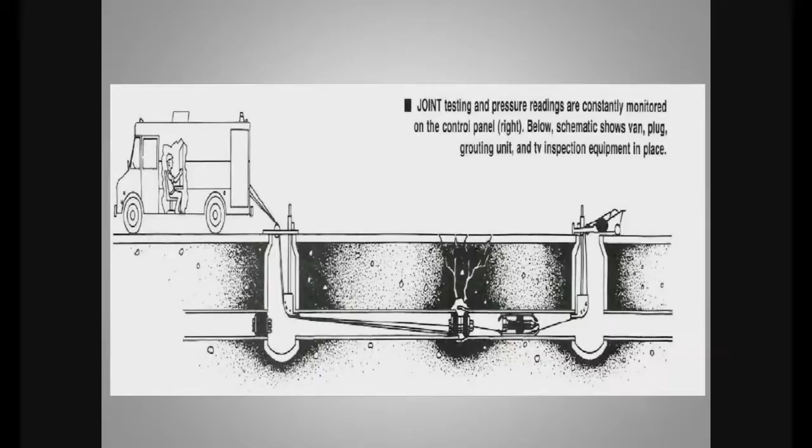So like with any other technologies, good jobs built confidence in chemical grouting, while bad jobs had just the opposite effect. So NASSCO was established to develop standards and ensure the growth of trenchless technologies. And chemical grouting was a big part of NASSCO's history right from the beginning. It was important to companies who did chemical grouting that all the companies would be held to the same standards. So the Performance Standards Committee was one of NASSCO's first committees formed to address the lack of uniform standards back in 1976 and before, and particularly with chemical grouting.

By 1978, a grout task force was started by Bill Thompson, James Witt, and Ray Barr, and some of the topics that they discussed back then were similar to those today. First of all, they influenced the EPA to fund research on grout alternatives, which would include performance specifications for all grouting activities. They promoted funding for private property or private laterals to address problems with private property I&I. Remember, this was back in 1978. And they educated system owners on the benefits of grouting with fact sheets and what we called sewer savers.

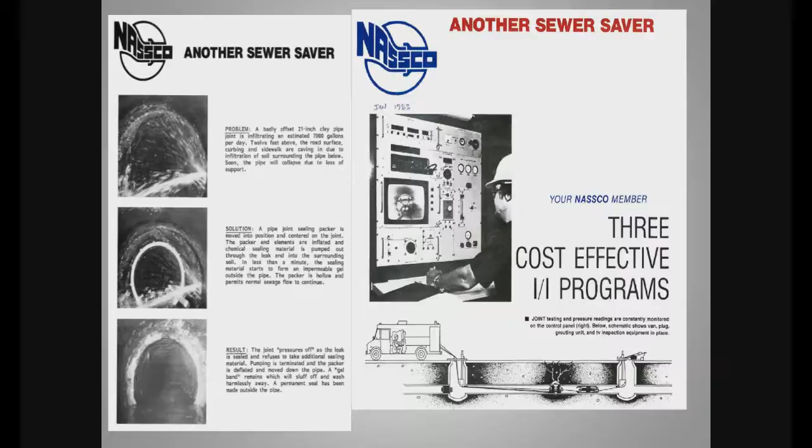So in 1980, NASSCO developed what was called the Inspector's Handbook. The Grouting Task Force also developed the Grouting Longevity Brochure, the Grouting Fact and Fiction Sheets, grout mixing and utilization forms, and a lot of educational resources like you see here. And by 1989, NASSCO had invested a significant amount of time and resources into grouting. But as it turned out, this was only the beginning.

In 1990, the EPA released an acrylamide report, and NASSCO met with EPA twice that year. The acrylamide ban that was proposed went on for 12 years until 2002, when the task force was successful in proving that the ban was really not necessary. So the ban was lifted for all the right reasons, and it was really due to the resolve of industry icons like Trent Ralston, Dave McGill, Norm Cerna, Bill Thompson, and actually our next speaker, Harold Kosova. You know, Mark Anktel is going to introduce these and many others who've contributed to the grouting industry and provide some more details on the ICGA.

I'll tell you, though, I just want to say that these NASSCO members epitomize NASSCO's resolve in taking a stand for the industry through cooperative efforts of competitive companies. They came together for a common goal, and they really achieved those goals. So since NASSCO was formed, the grouting industry has exemplified NASSCO's charter to serve the entire industry by increasing the success of grouting contractors to grow the entire grouting industry. You know, we're proud to have the grouting industry, now represented by ICGA, as a part of NASSCO.

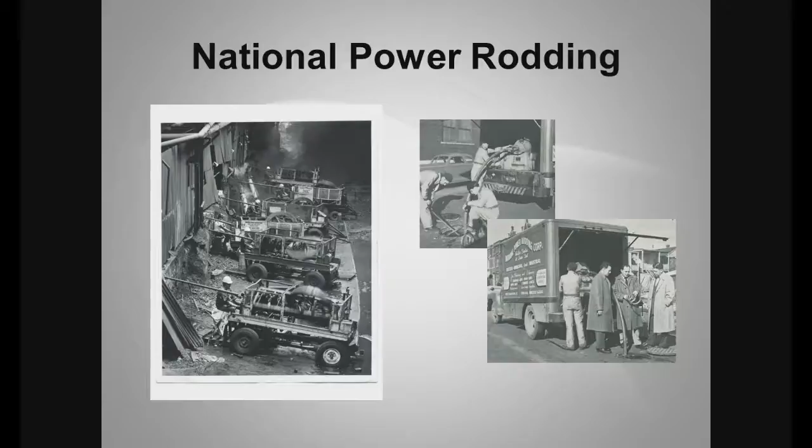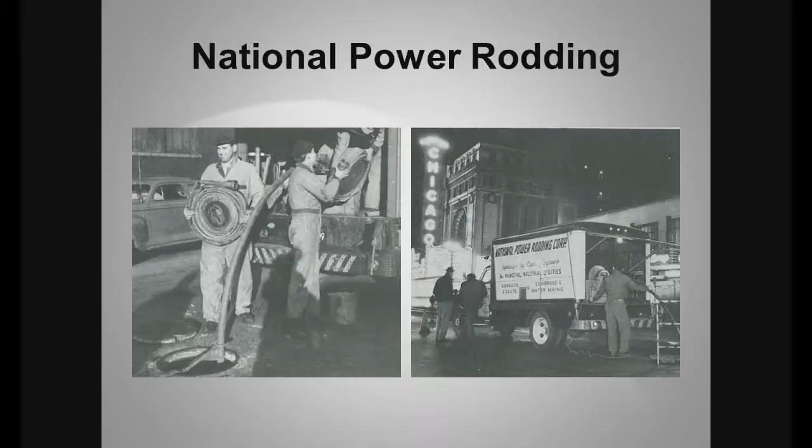and sewers. In 1960, National Power Rodding Corporation hired me as a graduate of the Tech to develop a television camera that could televise sewer lines. Over the next few years, NPR began developing methods to help remotely repair faults revealed by the closed-circuit TV cameras. The path to success was difficult and necessitated many failed attempts as well as complications and problems.

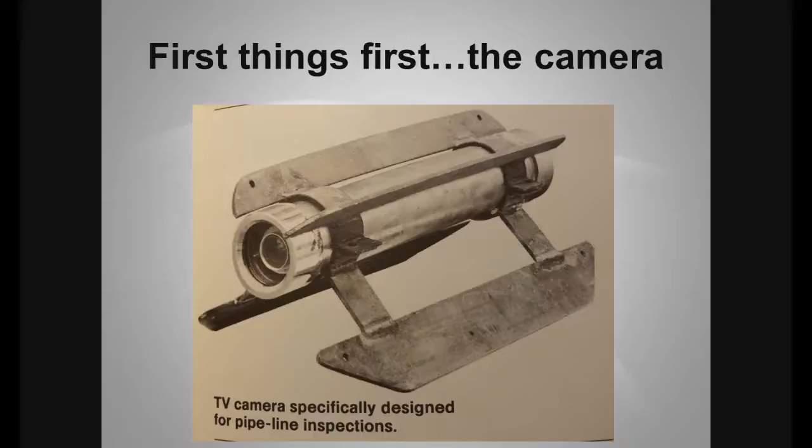To solve the problem of pulling the camera through the line, NPR had to first develop a skid which could carry the television camera. NPR also had to devise proper lighting as well as proper cable for the camera, requiring 28 separate wires that had to be connected to a watertight connector. The connector then plugged into the television camera.

The ability to use robotic technology to remotely repair sewer line problems was a major breakthrough, since it enabled the users to discover and repair a problem without the need to physically break through the street surface. This offered a significant cost savings to the company and to municipalities and industry. In 1962, NPR developed chemical grouting of sewer lines. The use of the television camera enabled NPR to perform pressure chemical grouting and sealing of infiltration in sewer lines.

It all started with the need to eliminate infiltration within an 8-inch sewer line, 25 feet deep, in Cottonwood Falls, Kansas. NPR had our newly developed video TV studio, and the contractor had chemicals newly developed by American Cyanamid. These chemicals subsequently became known as chemical grout. AM9 was the first and only product. The contractor and I developed a packer that would inflate on either side of the sewer line joint.

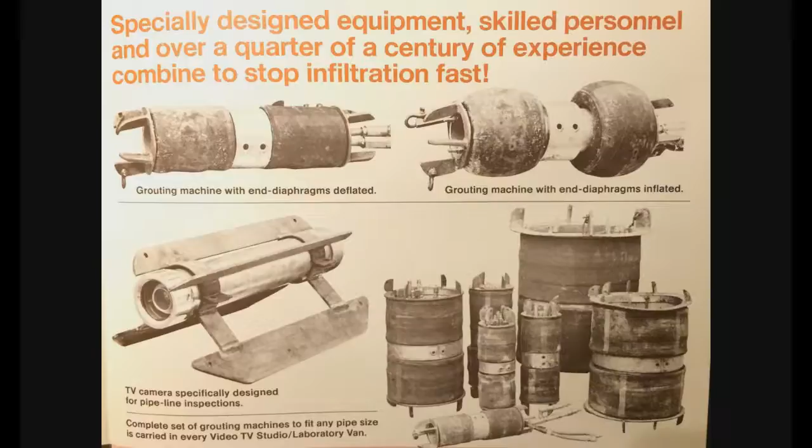We then mixed the chemicals and, using the grouting packer, pumped the mix into the sewer line joint and into the surrounding ground. This was truly an experiment, since no one in the industry at that time, including ourselves, could predict the procedure's success or failure. We pumped the chemical grout into all leaking joints, but were unable to get them to seal.

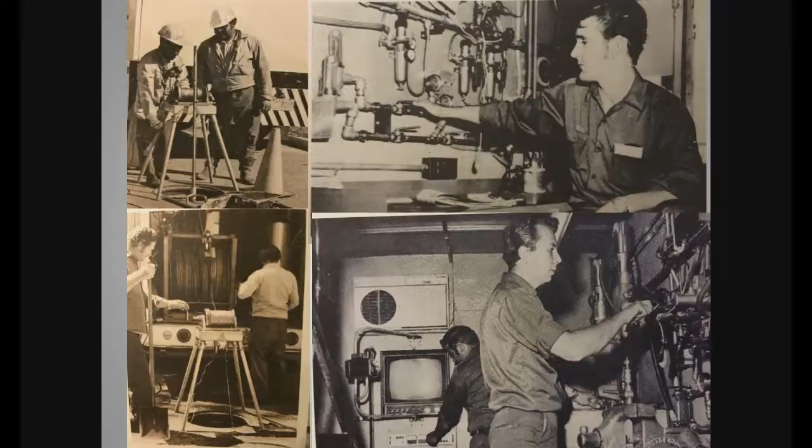Later, when getting to a downstream manhole, we removed the packer and proceeded to televise the sewer line again. To our amazement, all previously grouted joints were now sealed. We came to the conclusion that we had underestimated the time required for the grout to set. Accordingly, we adjusted the chemical formula and we were able to seal an additional sewer line with no problem.

There were plenty of mistakes made in developing a reliable grouting process. In one early instance, we used the same oar to mix two separate vats of chemical and found that one of the vats, the AM9 vat, gelled up due to residue from the oar from the first vat being an AP vat. We also had to find, through trial and error, the proper amount of pressure required for inflating the packer and develop an effective way to blow gelled chemical out of the hose.

Today, the cost of treatments to just watertight systems are important, and municipal grouting is more than mainline joints. It is also manholes and service connections. It is critical that everyone using chemical grout be fully educated in its safe use. Contractors and engineers must be taught the comprehensive process and the specifics of where and when chemical grout should be utilized. I see companies like Avanti and organizations like NASSCO advancing the standards and growing the industry.

I have had the pleasure to teach and mentor many people over the years. One of those was Pete Fleetwood, who now serves as president of Bionomic Services in Charlotte, North Carolina, one of the Carylon companies, and a most active grouting unit. And from one old guy to another, I am pleased and proud to introduce Pete Fleetwood as the next presenter.

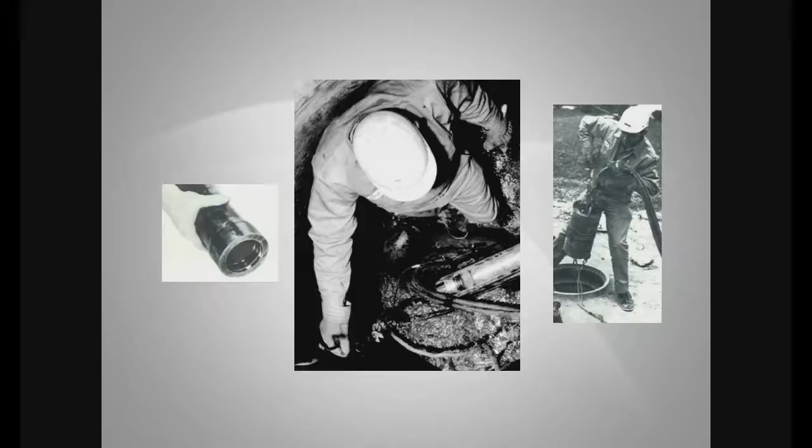What were the differences? Black and white camera weighed about 30 pounds. There was no pan and tilt. It was not self-propelled. We pulled it on a skid. Light bulbs were 500 watts, and they would burn you. Matter of fact, if you needed to light your cigarette, it was a pretty good option if you're out of matches. Images were recorded on a Polaroid camera positioned in front of the monitor.

In the 70s, we used the reel-to-reel video recorder. Then it soon progressed to a 1-inch cassette. By the 80s, VHS and beta formats were the tapes that were specified. Observation and sealing information was recorded on a paper tablet where we logged in abbreviations. You can imagine how confusing our reports were prior to PACP standards. Every operator, every contractor had their own abbreviations and naming systems.

In the early 80s, a computer-generated report became available, much like the McDonald's cash register: joint with cracks, joint with roots, burger with fries. A rod truck and a winch pulled the bucket machine. A winch called a bucket machine was used to clean the pipe. The truck could contain 1,000 feet of rod. Gas testers had not been invented. Confined space entry was seldom with a harness or a safety watch.

Once the line was cleaned and pre-TV'd, the rod pulled the camera and the packer, tagged by the cable from the bucket machine. Intercom was strung between the trucks, providing communication between the operators. Grout rig operator would relay: take it up, stop, spin, etc. The rod man would speak the footage when he stopped. The grout operator would log the footage on the tablet. A carbon copy for the customer and an original went to the office to be typed.

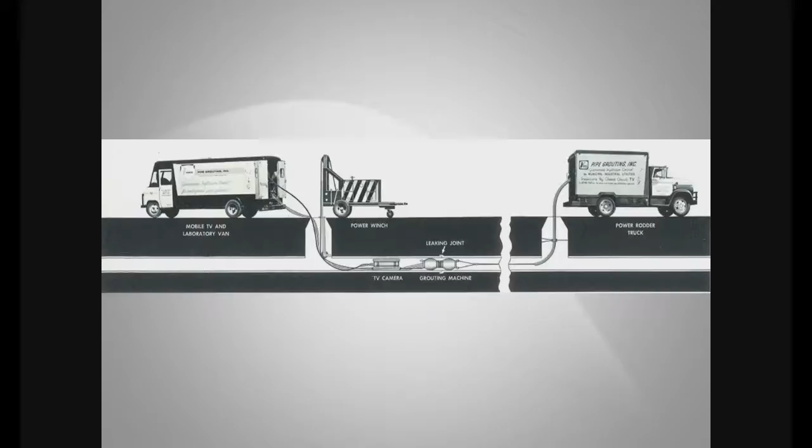Intercom signal was transmitted over a pair wire laid on the ground surface. If a street sweeper passed over the wire, communication disappeared. You weren't happy, nor was the street sweeper operator. When CBs came out, intercom was replaced. Initially, we didn't air test joints. Grouting was either consecutive or random. We manufactured our own packers.

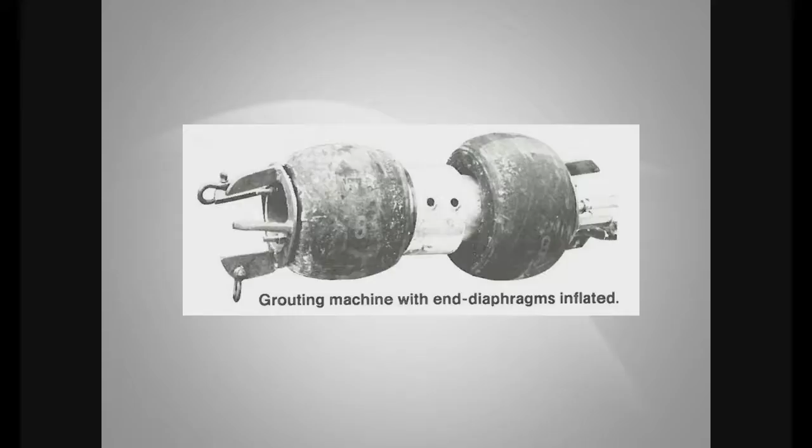Look at the size of the void. Bladders didn't last nearly as long as today's. A straight pin could cause a leak. Also, the video cable and the hose were very heavy. In a dry pipe, you were a heck of a man to pull the packer into the downstream manhole to disassemble. It wasn't long until air test was specified. We had no packers for 24-inch, so in a 24-inch and larger, you crawled the pipe and drilled.

Most important, until the last couple of years, I thought I knew all there was to know about grouting. Heck, I've been doing it since I was 20, before many others in the business were born. I was wrong. Temperature change, percent solids, gel times are relevant to quality. Jim Shelton, who's going to follow, gave me information that I had not considered.

The industry is improving. Harold's group gave us the technology. My group utilized it. Now the next group needs to use today's technology to continue the progression. Our goal is a sustainable environment for the next generations. The American story.

I'm honored to introduce Marc Anctil. He has been with Logiball for 22 years. He worked his way up to become the president. I enjoy him professionally and personally. Not only does he produce quality equipment, he can come up with some of the off-the-wall applications that I dream up. Mark? Thank you, Pete.

There's been a lot of industry game changers over the years, and I'm going to try and explain some of these to you, so please bear with me for the next few slides. One of the reasons we're still here, or when this got started, is because of the Clean Water Act of 1972. We decided to take care of basically every water that was out there, not polluting.

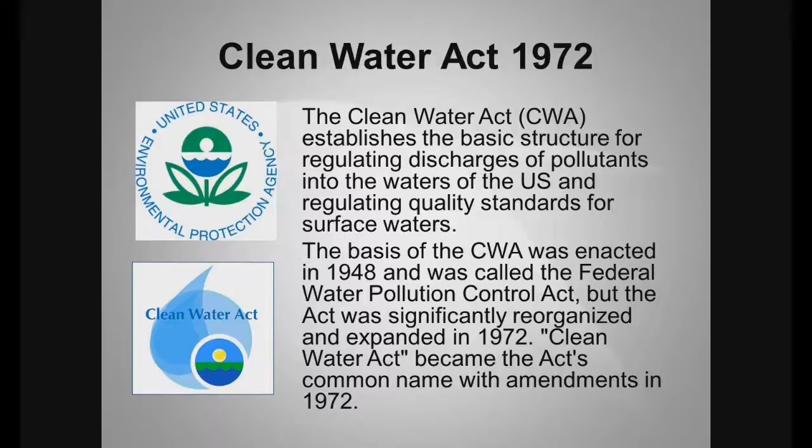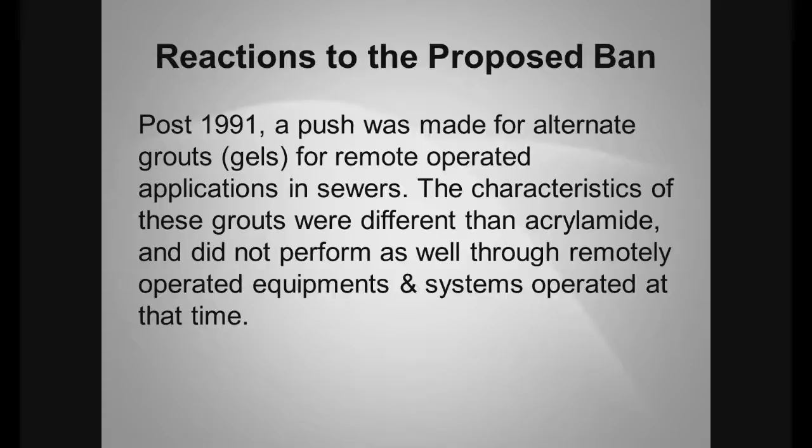In 1991, as mentioned earlier, the EPA had a proposed ban on acrylamide grout, and one of those reasons was basically the PPE for the operators. As you can see from these pictures, times have changed. One of the reactions to the proposed ban was a push for alternate grouts, but the equipment of those times and delivery systems through remotely operated equipment were basically not the best match for these new alternate grouts. Well, NASSCO and the Grout Task Force spent many years discussing and I'd say fighting the proposed ban on these grouts.

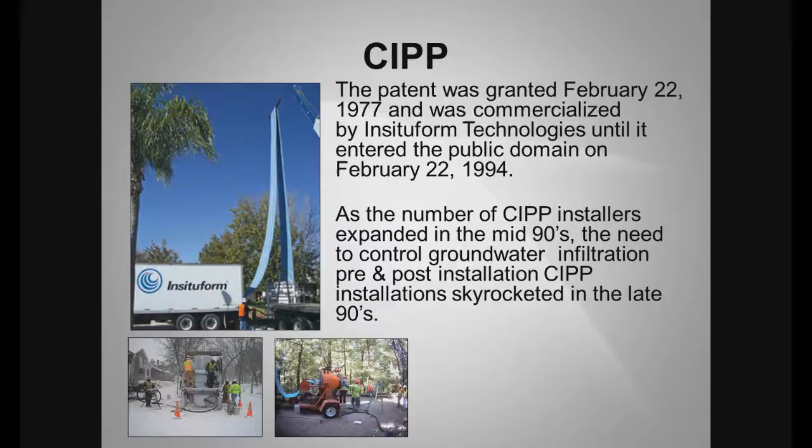In 1977, CIPP was invented and Insituform had the patent. When the patent ran out in 1994, this technology became available to all, and there was a greater need at that time to stop pre- and post-infiltration of the installations. Now that a lot of work had been performed on main lines, the groundwater infiltration was not disappearing. You would see water come in at the pipe-to-manhole connections and also at the reinstated service laterals in the relined pipes. So in the mid-90s, lateral packers became available and were used to stop this infiltration at the connections.

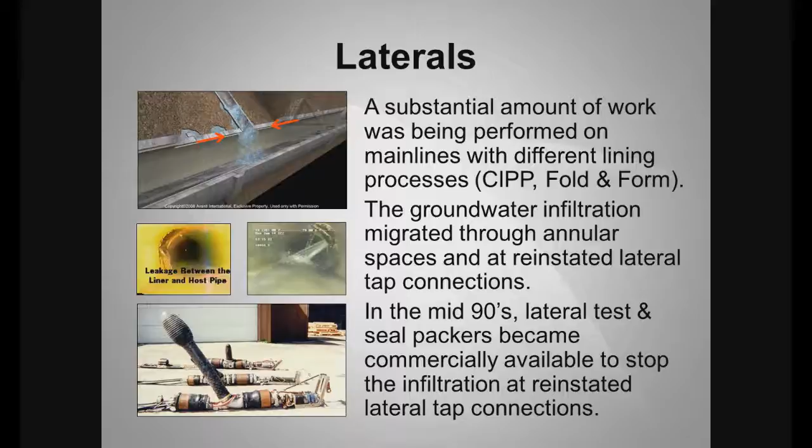In 1998 and 1999, too, the associations presented their Most Innovative Product Award to people in our industry, recognizing that chemical grouting, or injection grouting, definitely had a place in the market. Back in December 2002, the EPA had removed its proposed ban, and now that appropriate PPE would be used by the operators, acrylamide grout was back.

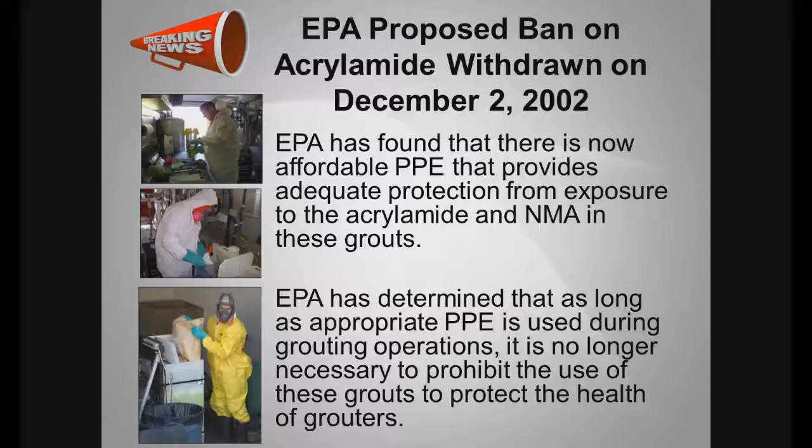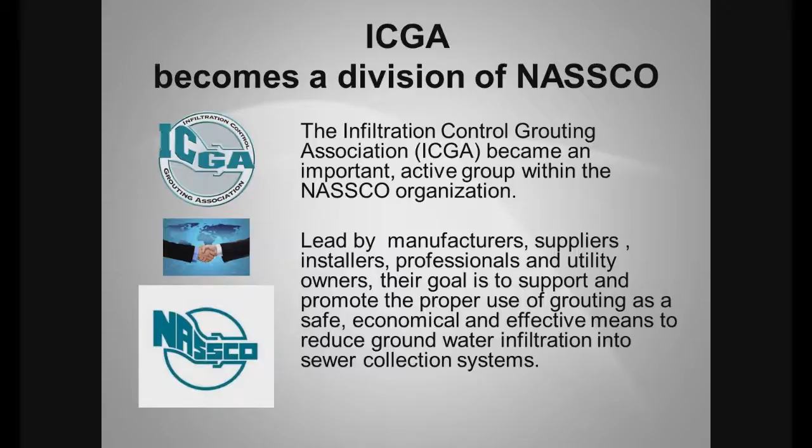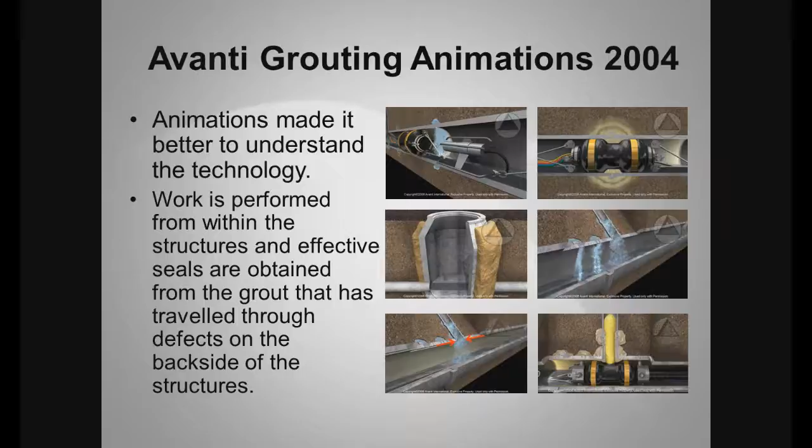In 2006, NASSCO and ICGA members, led by Dick Shans from Mary's, got together and formed a multi-vendor class, the first grout boot camps, where people come in, whether it be 20 years in the business, new ones, inspectors, engineers, for 2 days, sit down, work, and try and understand what the grouting process is all about. This is 10 years old, and we've now trained over 450 people at these classes.

Today's capabilities. Well, if we go back 40 years ago, what we can be doing today is totally different. We're sealing laterals from only the mainline access up to 30 feet. We're sealing pipes up to 12 feet in diameter. We're sealing pipes that have elliptical shapes. And we're coming up with solutions to problems that we encounter on a daily basis.

For the next presenters, it's my pleasure to introduce to you Ron Manistar from Mary's Industries and Mark Schneider from Q's. These two gentlemen have a wealth of knowledge in the delivery and camera systems. Ron? I'm going to take it, Mark. Thank you. First, people, don't be fooled by my picture. I'm very happy to be here speaking today.

Ron and I are going to be talking about the equipment used in the grouting process, and I'm going to start with chemical hoses. The chemical hoses originally started with 3 hoses, like was said earlier, which basically allowed 1 hose for each chemical and 1 hose for air to inflate the packer. Later, the hoses moved on to 4 hoses, which gave the ability to add an air medium or a water medium to test the joint to confirm whether it would need grout or not.

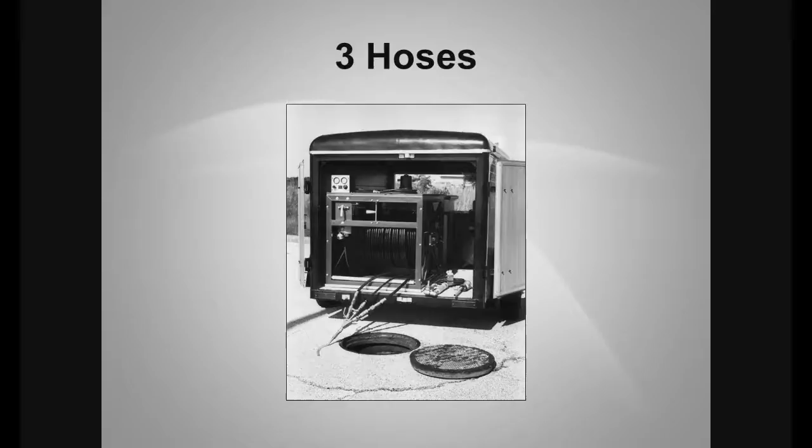Eventually, we moved into 5 hose systems, which helped better facilitate Mark's lateral packers, especially when they needed to lateral test. The 5th hose is typically used now to do the air test, because the 4th hose was then needed to inflate and deflate the lateral sock. Hoses range in length from 500 to 800 feet and typically include some kind of dripless fitting or check valve on the end of the hose to keep the chemical from leaking out when it's disconnected from the packer. I'm going to pass this on to Ron. He will continue with packers and other parts of the system.

Thank you very much, Mark.

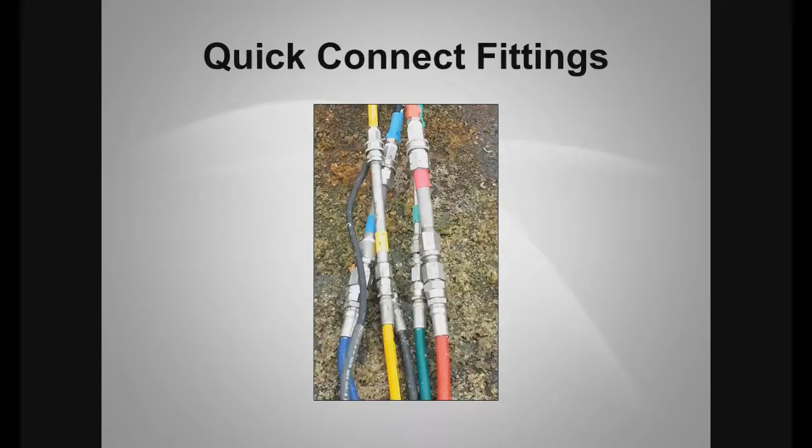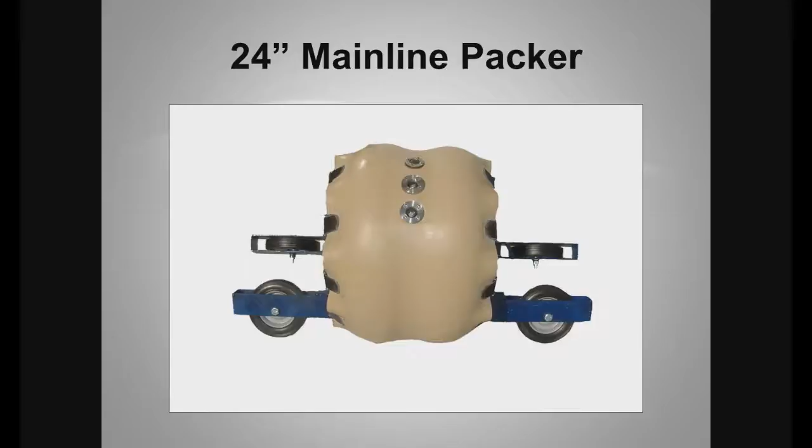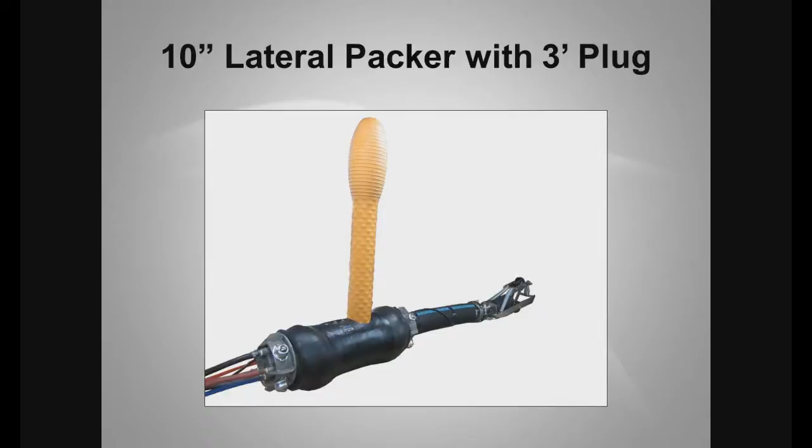A lateral packer is designed to grout the connection at the main line. The packer can rotate so that the connection between 8 to 4 o'clock can be grouted. Lateral sealing distances can be varied from 36 inches all the way to 50 feet. Here we have a lateral packer that is being used to grout the connection all the way to the property line.

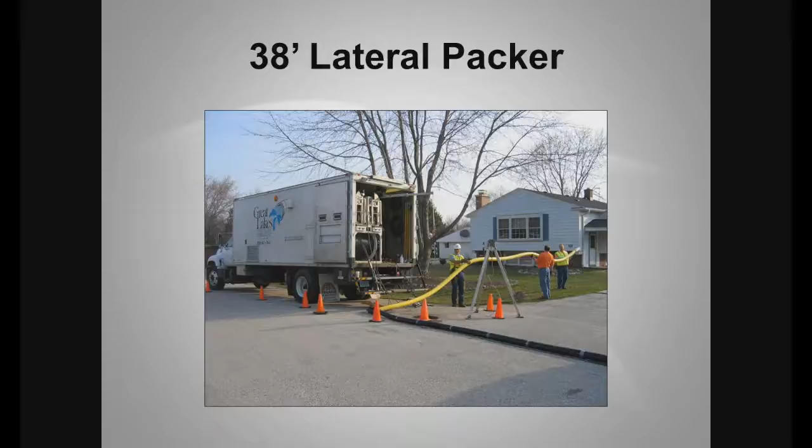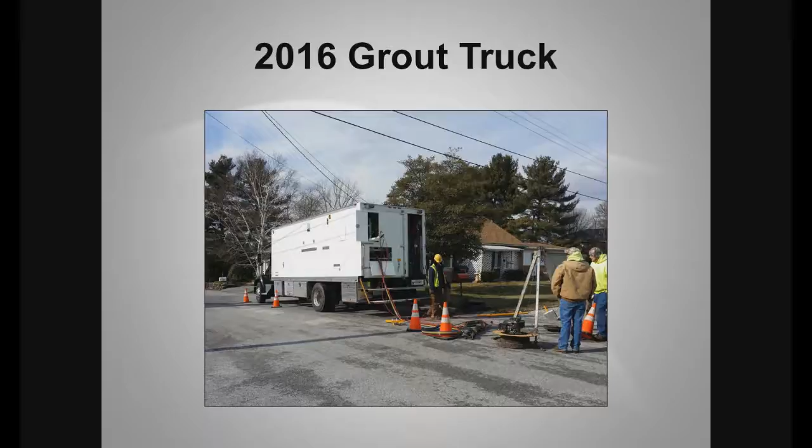Grout trucks for many years were built into step vans, affectionately called the bread truck. Very popular for many years and an industry standard. With newer vehicles now growing much larger because of safety and productivity requirements, a lot more equipment is now being installed into these trucks. Chemical tanks have increased in size from 30 gallons to 60 gallons. This increase in size reduces the amount of time that the grout technician needs to mix chemicals and enables him also to improve his productivity.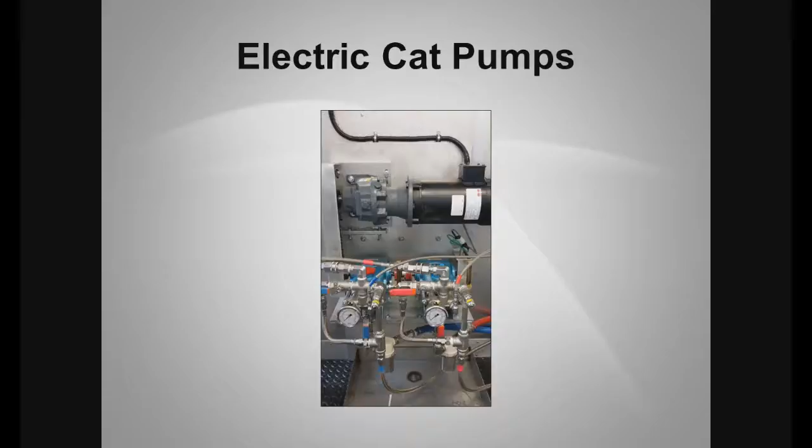Electric pumps, with their variable speed capabilities, can be controlled so that the flow matches the pathway opening through the pipe into the surrounding bedding material. The air system needs to be large enough and sized properly so that there is no loss of performance while inflating the packer and the lateral plug. A vacuum system is necessary to pull the air from 800 feet of hose and a lateral plug, enabling the lateral plug now to fully invert back into the packer before continuing down the pipe.

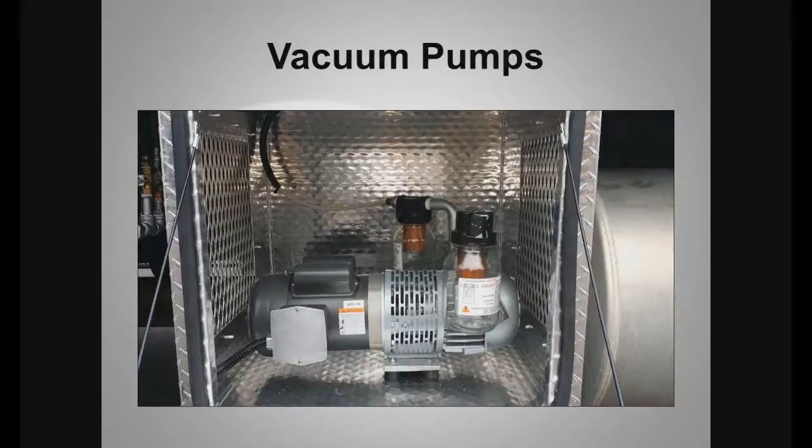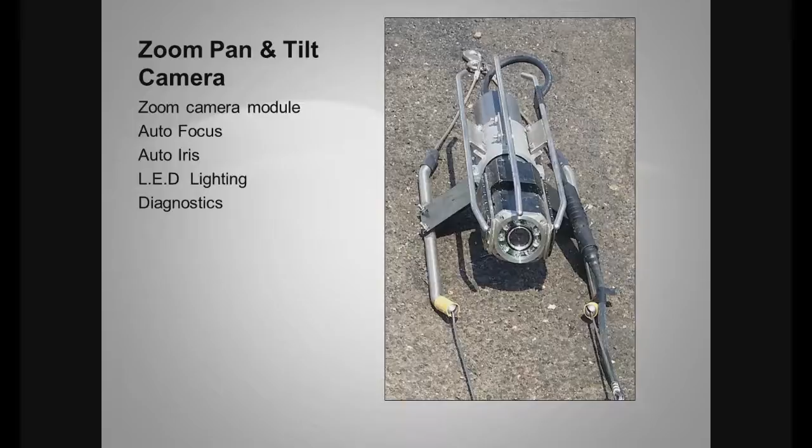The first pan and tilt cameras allowed the grout technician to view the joint and into the lateral connection. Over the years, there have been improvements with zoom capabilities, LED lighting, and camera diagnostics. And improvements are still being made with smaller cameras and wiper blades to remove the debris from the lens.

Mark, I'll turn it back over to you.

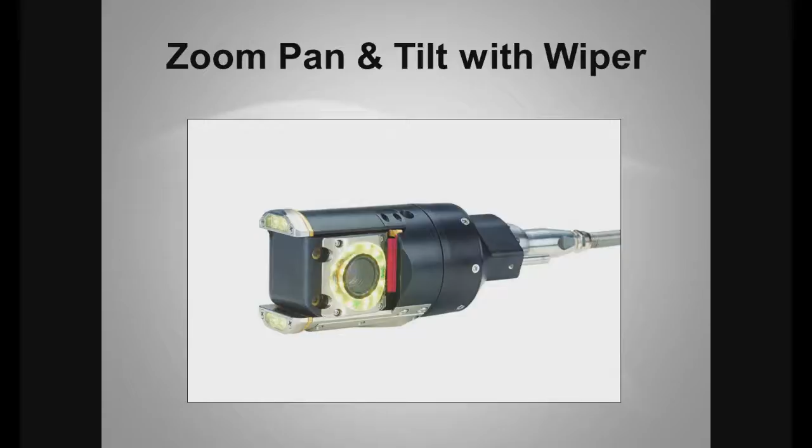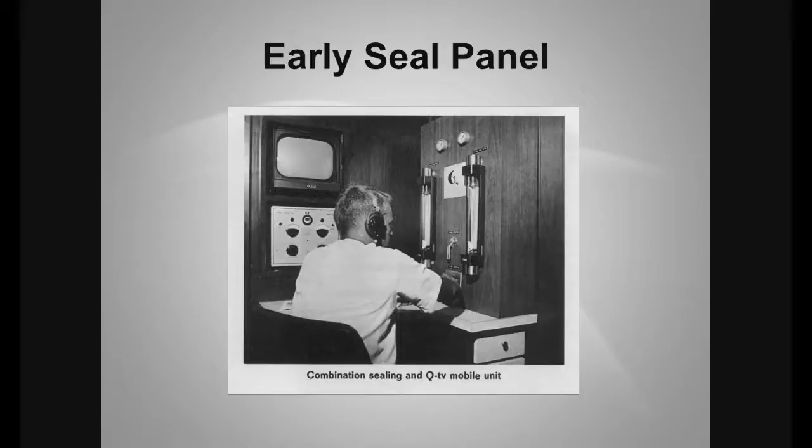Thanks, Ron. Now, there was something needed to control all of this equipment, some kind of panel. The first panels you saw earlier were air-over systems, and all that was really needed was sight tubes and control valves to push the chemical in, and a valve to basically inflate the packer. When pumps were introduced, the panels moved on to manual panels. These combine the packer inflate and test control regulators with the other controls, which would be to check the amount of chemical used, air test pressures; all that information was brought in. Also, panels were introduced to control the lateral packers that were typically added onto these type panels.

The latest technology allows for remote panels, which control a panel that has regulators and valves inside it, and is all controlled by computer. This allows for the industry specifications to be entered into the software to make sure the operator conforms to these specifications, such as minimum test pressures, packer pressures, and duration of the air test. This technology also creates a live graph of void pressure to help the operator adjust the grout pump rate as required and also watch the gel time. The computer control also allows for much more data to be recorded than the original handwritten reports or manual entries into today's pipeline software. Don?

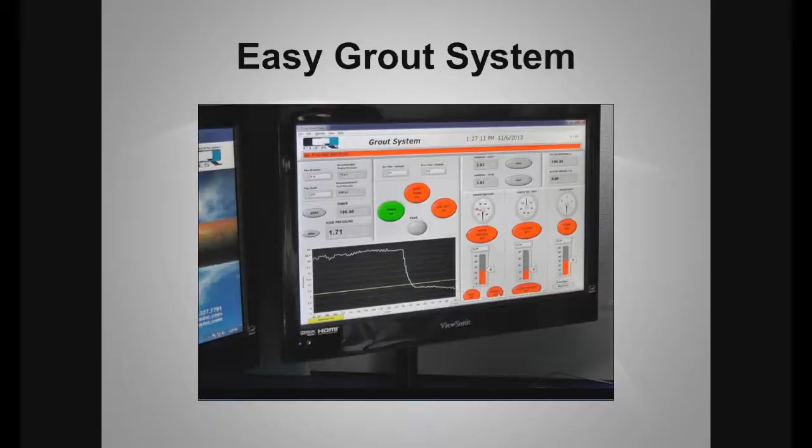Yeah, very good. Thank you, Mark. It's time for another poll question, and we have 3 of them in total. Let me send this survey out. Looking back, which technology used in grouting has advanced the most? I'm looking for a single best answer here. I'm going to give it a couple of seconds, and I'll play back the results for everybody. I think that's always interesting. Trusting you see the question, and the answers are coming in, slowly. Let me go ahead and end this question and play back the results. And it's looking like remote packers and conveyance equipment, very close with CCTV.

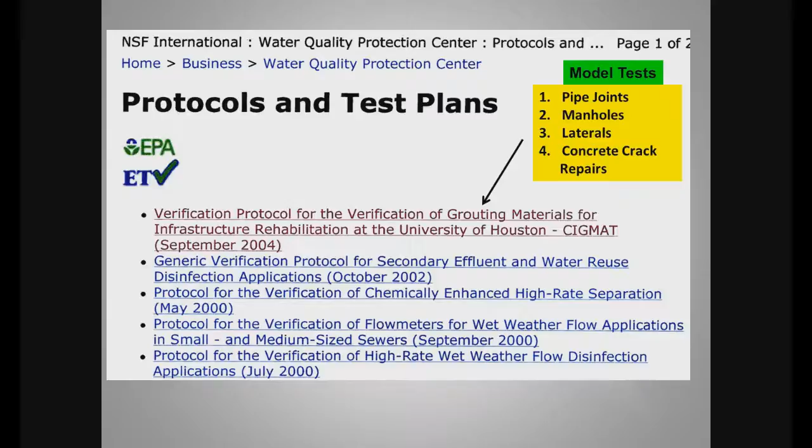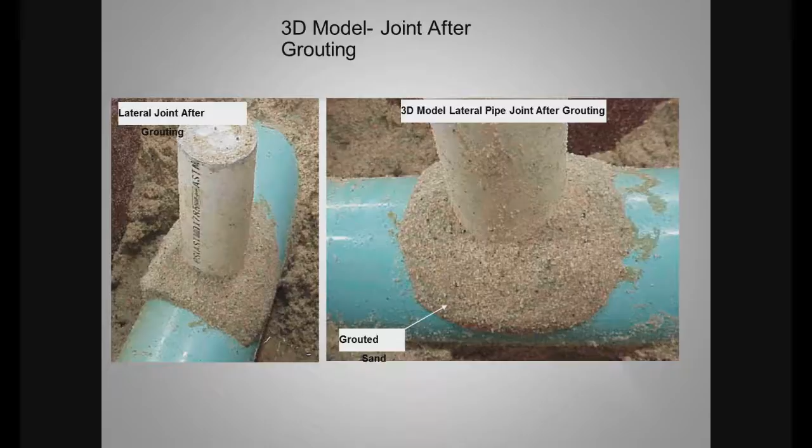If you do a repair on a lateral, how does the inflow stop? You can see from this figure how the grout gets out and actually reduces the permeability of the filling material. And you can see the shape of it. We have done modeling on all this, so we want to clearly explain the fundamentals of it, and this gets people to think about how they should be grouting to seal the joint. So this is what it is, and this is all documented.

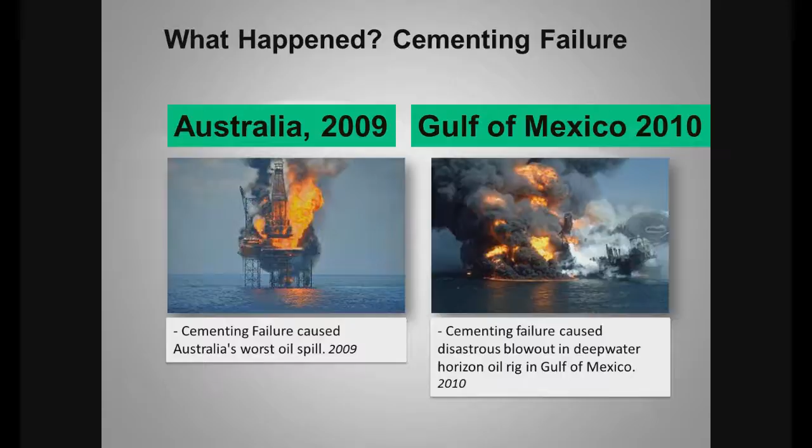So we were fortunate. After this disaster, the Department of Energy, DOE, gave us $2.5 million to develop my new concept of smart cement. And we just finished up this report. It's a 4-year study where we developed the material, demonstrated it at different scales, and we have a model well in the field that we have cemented using our smart cement, and it is working very well.

So as you all know, Romans developed this cement for application thousands of years ago. Somehow we just kept on using it. Now with our new ideas, we are moving on with new thoughts of how we can make all our grouts to be very sensing. So we have not only made the cement to be like our skin, I have also built the brain system to monitor it and tell you.

So it's a complete system that we have developed so that you can monitor the cementing during the installation and during the entire service life of the well. So we developed this concept recently, and now we want to move on with this knowledge that we gained into the grouting area. So we are really now working and developing smart cement grouts and also smart polymer grouts. And we are making them very sensing. This is research, it's ongoing.

We are making the grouts to be chemo-thermo-piezoresistive. That means they are sensitive to the chemical, sensitive to the temperature, sensitive to the stresses. And the monitoring system has to be developed. That's very important. Models have to be tested out, and also we have to quantify an analytical model. So basically what our future direction is going to be: developing these smart grouts with different compositions, but

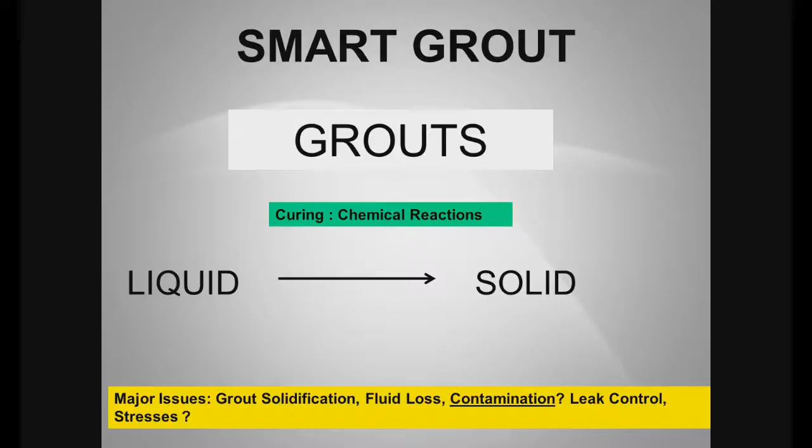So in summary, I just want to let you know that over the 30 years of development, we have worked hard, and now EPA has a verification program for testing and verifying grouts, and also grouts have been used in so many applications. You had so many speakers before me talk about it. It's been used for soil improvement, treating contaminated soils. We are using the grouts for concrete cracks and others to prevent leaks. So this is ongoing. So where do we want to go next?

Our next major focus is going to be to develop this smart grout, so that when they do these operations, they can continually monitor what's going on with the grout and monitor it during the entire service life.

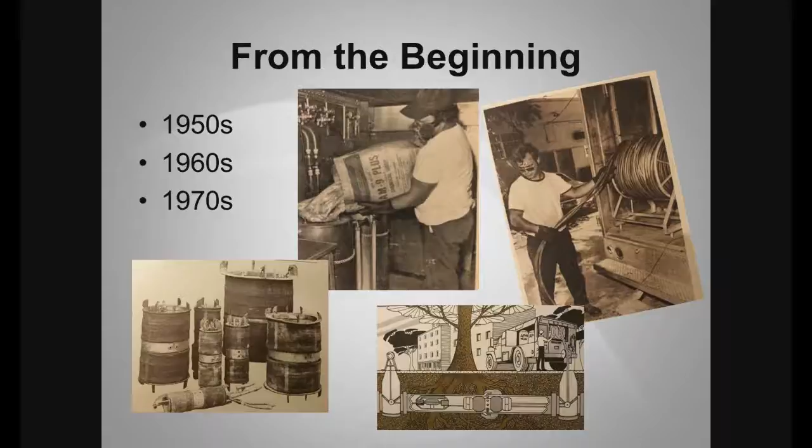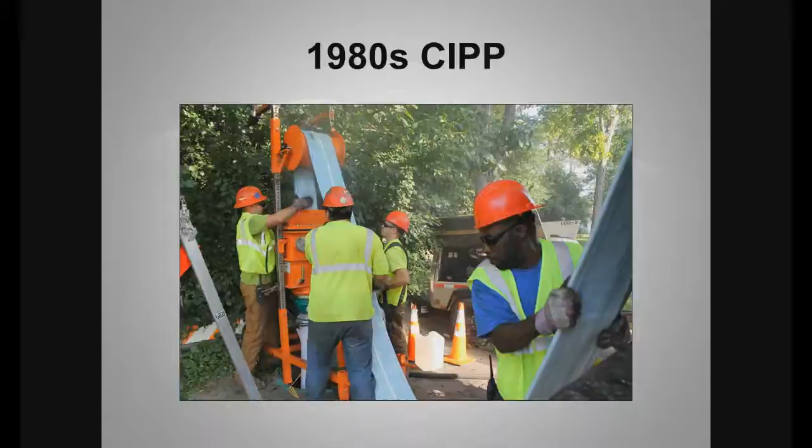Earlier we heard chemical grouting had its beginnings in the mid-50s. Its development and use excelled through the 60s and 70s, but it was in the 1980s that cured-in-place pipe, otherwise known as CIPP, was introduced to the world and quickly took the place of chemical grouting as the #1 trenchless technology. CIPP, known for its high structural strength and 50-year design life, became the sole choice for engineers for rehabbing sewers. It was believed by engineers that CIPP had a chemical bond to the host pipe.

But what they didn't know is this: CIPP, by design, is a standalone product. It is not reliant upon the host pipe. If anything could be said, it is that CIPP has a mechanical bond. So why is this fact so important? Because CIPP has an annular space, and that is caused by the cooling of the product. The host pipe still has the cracks, the fractures, and the open joints. The water, the infiltration, still enters the pipe through these openings. It travels along the annular space, and it enters the system at the lateral reinstatements and at the manhole terminations.

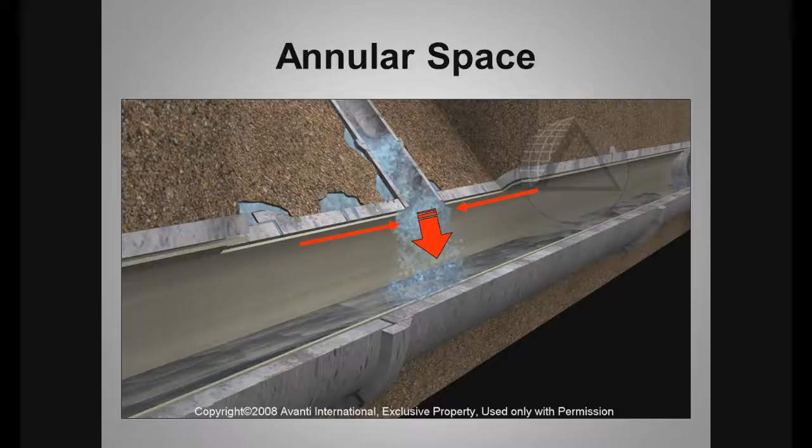Today, we are using chemical grouting to seal annular space in CIPP at the lateral openings and in the manholes at the termination points. By using a lateral packer, we are able to inject acrylamide grout into the annular space and also to the exterior of the lateral connection, post-lining. We're going back into cured-in-place pipes and creating a watertight mainline system by using CIPP and chemical grouting as complementary technologies to one another.

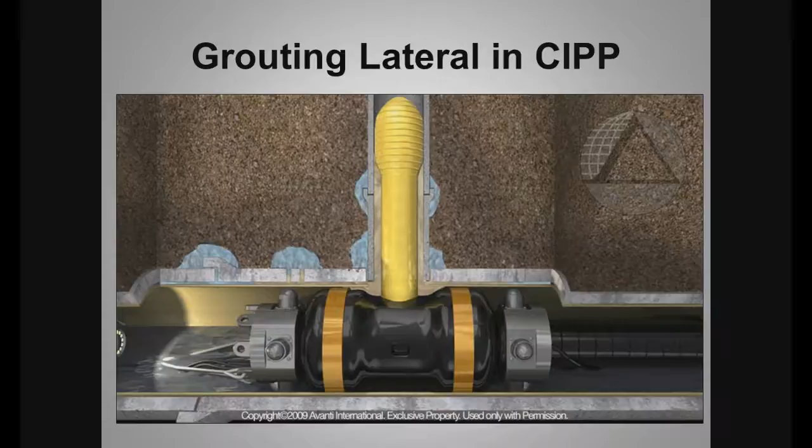In today's world of pipe rehab, engineers are quickly adopting the practice known as the holistic approach to eliminating infiltration. That is, to completely eliminate infiltration, all 4 points of possible entry must be addressed: the manholes, the mainline joints, the service line connections, and the laterals.

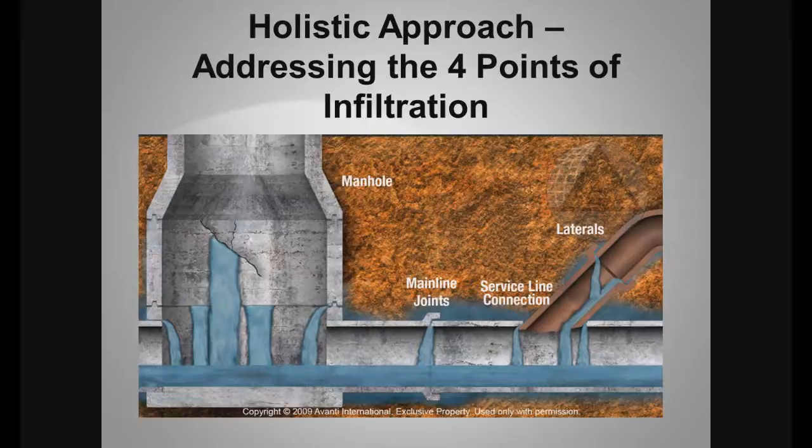Water migration is real. Water travels along the sanitary trench and will enter your system at any of those 4 points. If you address 1 or 2 of these points but ignore the others, water will quickly find its way to the other points of entry. We are beginning to see

proactive maintenance projects come out for bid where the engineers are now using a combination of technologies, that is, cured-in-place pipe, chemical grouting, manhole rehab, and lateral grouting, together as complementary technologies to achieve a completely watertight system. If the pipes are in good condition, we will test and seal the joints with chemical grout. If the pipes are cracked and fractured, we will line them using CIPP.

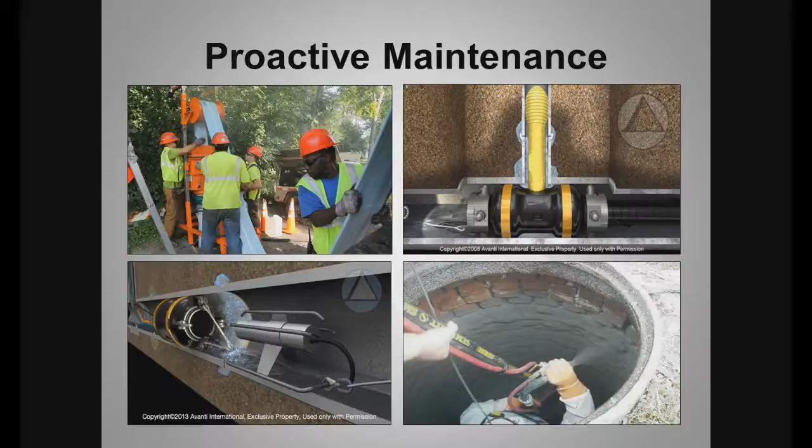The laterals are being addressed with grouting and lining from both the main lines and the cleanouts. And finally, the main manholes are being curtain grouted if they're in good shape, or lined with concrete and epoxies if they need to be rebuilt. I have been involved in a number of projects, but there is one that will always stand out in my mind, and that is Naperville, Illinois.

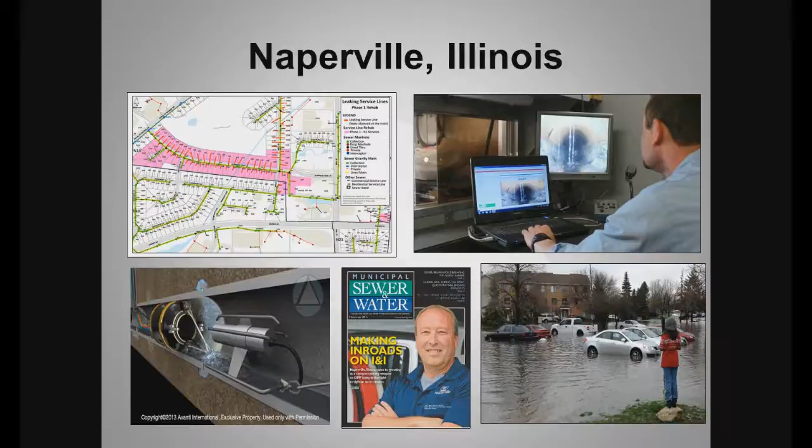The area in which we were working had a high groundwater table and a very big problem with active infiltration, so much so that we had to grout the mainline joints and the laterals before the main lines were lined. Without grouting first, there would have been a problem of resin washout in the CIPP as it was being installed and cured. Once the main lines were sealed with grouting and lining and the laterals were sealed using a 38-foot sock, the manholes themselves began to leak.

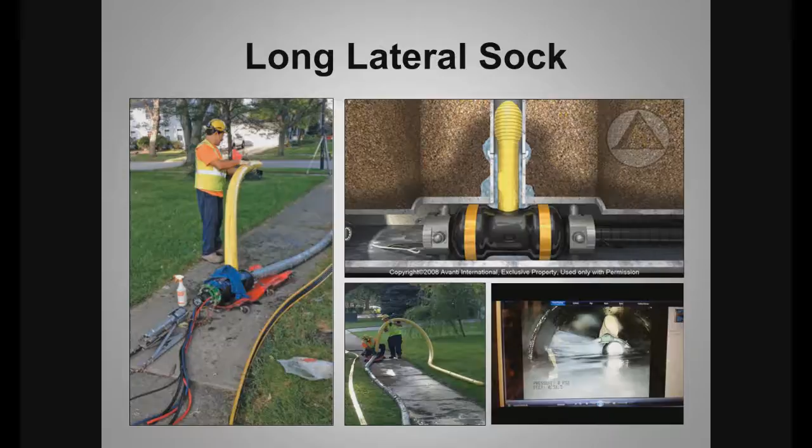The water, having no entryway into the system, had migrated to the manholes and was preventing the installation of the lining product. Once they were curtain grouted, the manholes then could be lined, and then the project was completed, addressing all 4 points of infiltration.

Today, we are using chemical grout in a variety of ways. We are testing and sealing mainline joints and structurally sound pipe. We are sealing laterals from both the mainline and the cleanouts. We are sealing manholes by curtain grouting, and we are using chemical grout to seal the annular space in cured-in-place pipe at the lateral connections and the manhole terminations in both newly installed and old liner pipe.

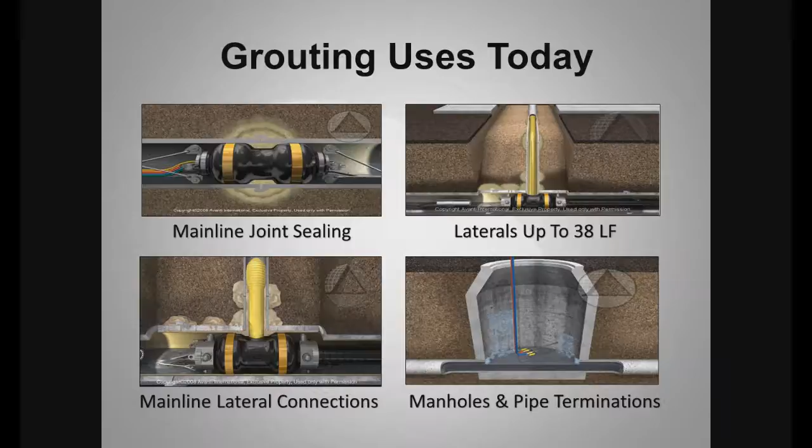Next up is Jim Shelton. Jim's a good friend of mine and the Vice President of Buried Infrastructure at Arcadis. He leads a team that works closely with utilities to conceive, develop, and implement rehab solutions, especially around I&I reduction projects. Jim?

Thanks, John. So most of my job is dealing with utilities and helping them figure out what technologies to bring. When it comes to speaking with them about grouting, they always ask the same 2 or 3 questions. How effective is grouting at eliminating I&I, especially the groundwater infiltration? How long can we count on it continuing to do that? And then as John said, given the preponderance of lining work, how does it compare to lining from a cost standpoint, from an effectiveness standpoint, from a longevity standpoint?

I think it's worth saying that if you do grouting incorrectly, it's not going to last. And that's been the experience of many folks. When it's not done properly, 6 months to 2 years is very common. But we knew that there was a proper way to do this, and going back a decade or a decade and a half, we were predicting about a 15-year life for grouting, and we were assuming at the time about a 25% I&I removal if we used it holistically.

Since that time, we've been able to do 2 things. We've been able to go back and do some medium-term testing. This is work that was done 7 to 10 years after the grouting work was done. We went back and we actually retested the exact same joints and tap connections that were done and found an extremely high rate of pass. They were holding up much, much longer than we thought. We also now have the ability to address additional defects and lateral components that we did not have before.

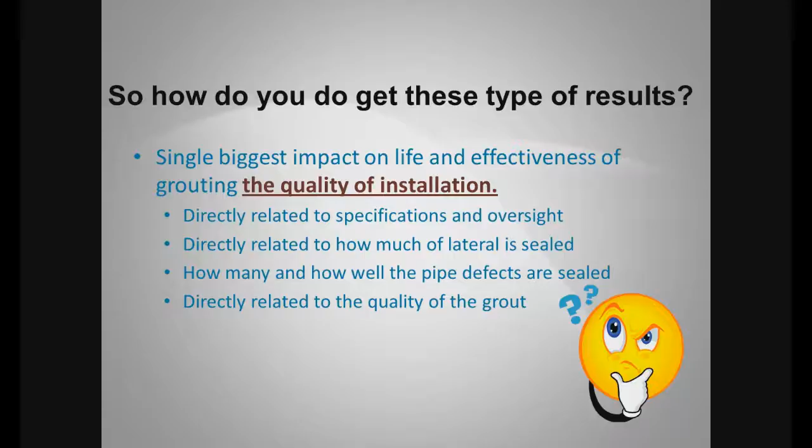About 5 years ago, NASSCO and ICGA put together the first of their suggested standard specification. This was an industry collaborative effort to try to codify what was in the ASTMs and what was being done in practice. That document's been around for about 5 years now, and it's really governed what we've been doing. We're in the process now of completely rewriting that spec and converting it from a suggested specification to what most engineers are used to, which is a master specification, which will have full instructions to engineers on when to do different things within the grouting world. There's an awful lot that happens in the field, and understanding how your specification should accommodate it is an important part of getting effectiveness and longevity.

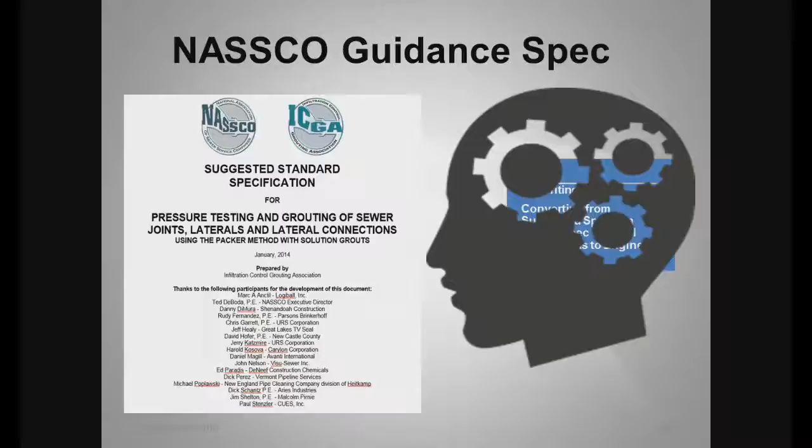Now comes my favorite part. There's only two things that engineers really get to do. We get to think about the future, and we get to make up acronyms for things. So let me talk to you about my acronyms and what I see looking in the crystal ball.

In the next 2 years, I think we're going to perfect the longitudinal defect fracture grouting packers that are going to allow us to do not just circumferential fractures, but also spiral, longitudinal, and multiple fractures. And advance that from a pilot practice that's been extremely successful to becoming a standard tool in all grouters' toolboxes.

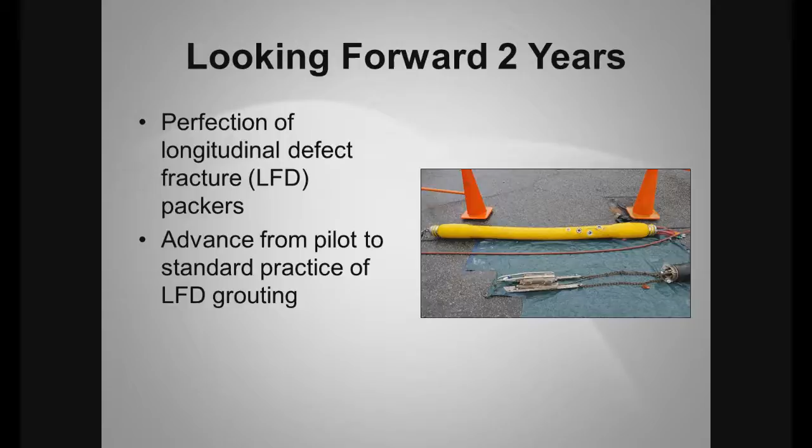I think we're also going to see the perfection of what we call LACO packers, or lateral access to clean-out packers, to allow us to grout all of the lateral from the clean-out all the way back to the main. Many laterals are 80 feet, 90 feet, 100 feet long. The ability to get the leakage that's coming into the terracotta portions of that is extremely important. We've piloted many of these tools and practices. I see us going to a standard practice.

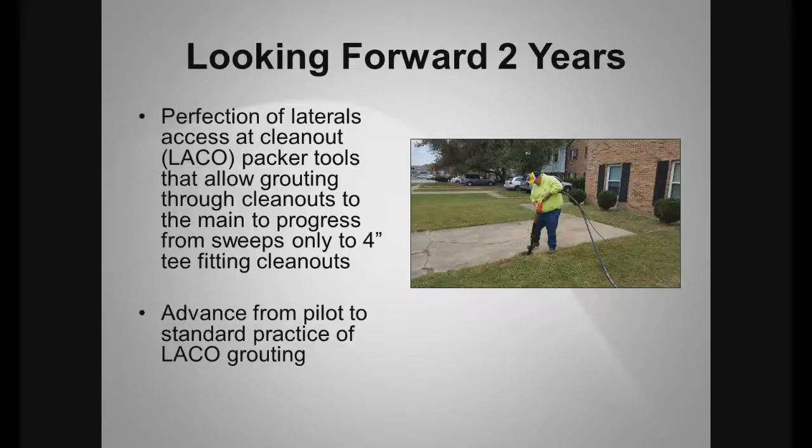We're also working on developing a NASSCO certification program. This is a new ITCP program that's focused on teaching engineers and inspectors how to specify and inspect grouting works so that it's consistently and reliably done.

I see that time also where we see widespread use of double sweep tees being put in at the cleanouts that allow us to eventually do the part of the lateral that goes to the home, that brave new frontier of the private side, which eventually will have to be addressed in order to get the leakage that's happening on that portion of the system.

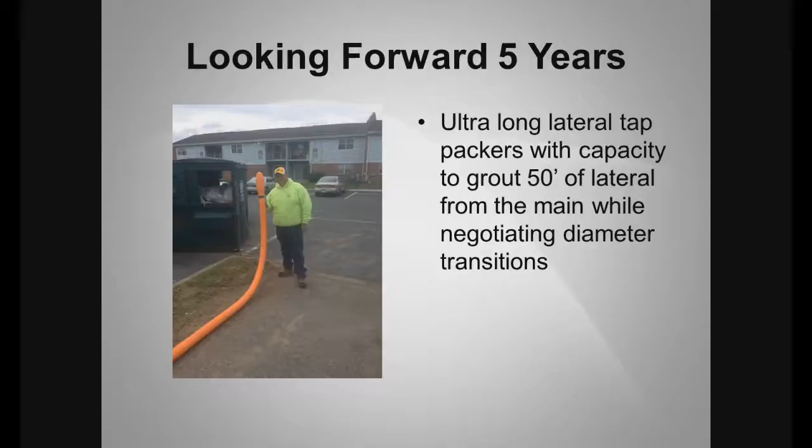You heard the guys talk about ultra-long lateral tap packers. I see the day when we can get to a 50-foot packer, but not only a 50-foot long sock, one that's able to negotiate multiple diameter changes and changes in direction at the same time. So we're effectively able to get a huge amount of the lateral from the main line.

A lot of the work I do has to do with interceptor systems that are typically built with reinforced concrete. And many of those have issues with surface protrusions where the corrosion is eating away at it.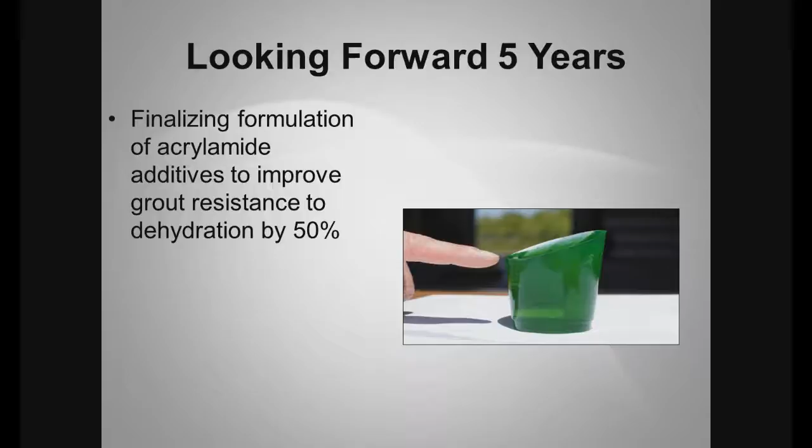I can see a time coming in the next 5 years where we have packers with specialized rubbers on them that allow us to really grip into aggressively protruding aggregate, to allow us to save all that money we're spending on lining simply because we've got a few leaking joints in a concrete pipe. And I also see us finalizing the formulation of the additives that we're putting in acrylamides so that we improve its resistance to dehydration by 50% over where it is today. It's very good today. I see it getting even better.

I think we'll also be at a point soon where we'll be able to optimize how much grout volume we put out in each diameter. Typically, we follow the rule of thumb of a quart per inch diameter. That's an ASTM standard. We want to try to optimize that and optimize the grout pumping rates as a function of leakage so that we can get that amount out there.

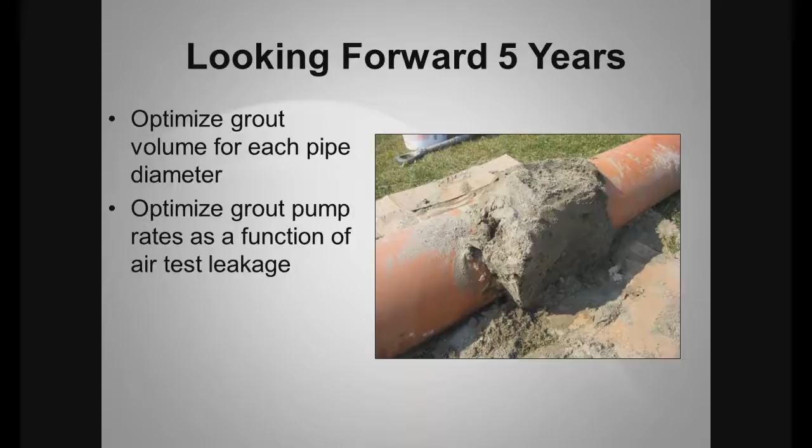The electric pumps that you saw in the earlier presentation are certainly going to take us away from the air pumps and allow us to do that. In fact, I can see a time when actually that pump rate is completely automated, adjusted based on what the fall rate is when we test the joint, and it adjusts the pumping rate so we're able to get our estimated amount of grout out there.

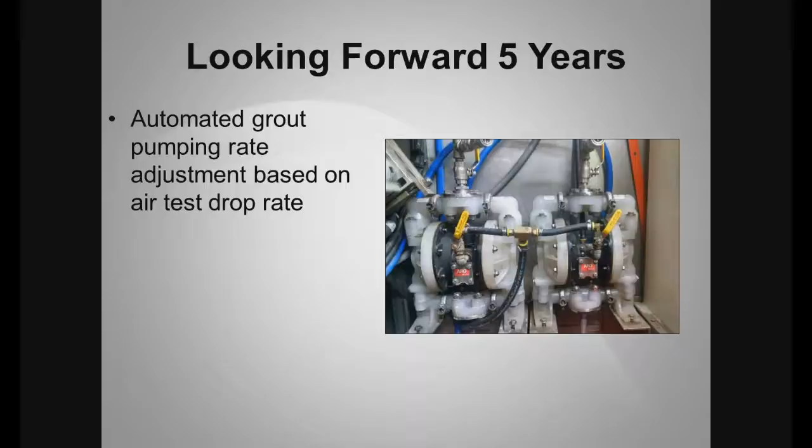5 years from now, we'll be going back into the areas where we did the 10-year study, and we'll be completing a 15-year study for grouting longevity. I foresee that will allow us to predict the grouting is going to last 30, 35, 40 years, as well as going back to an area where we did the first large-scale tap connection system using grouting to seal the annular space and doing a 7-year longevity testing program there to really confirm in a very engineering-specific way just how well that type of approach works.

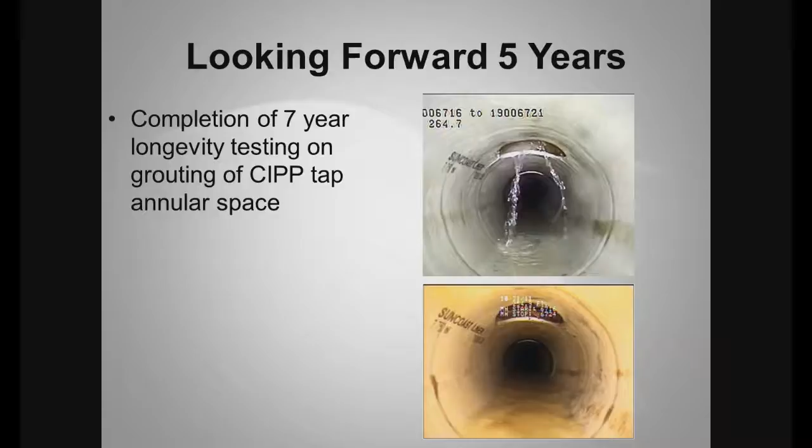I think 5 years out from now, we'll also modify the ITCP program so that we're also certifying the grout installation technicians so that not only are the engineers and inspectors trained and certified, but the technicians actually installing it have a defined level of expertise.

At the 10-year point, I can see us having completely new grouts. Grout that's completely immune to dehydration. It's got adhesion properties so that when we grout longitudinal defects, it actually glues them back together. And it's got the flexural properties to deal with seismic areas. It's got the stretch properties to deal with sea level rise changes and the increased pressure that's being placed on grouts.

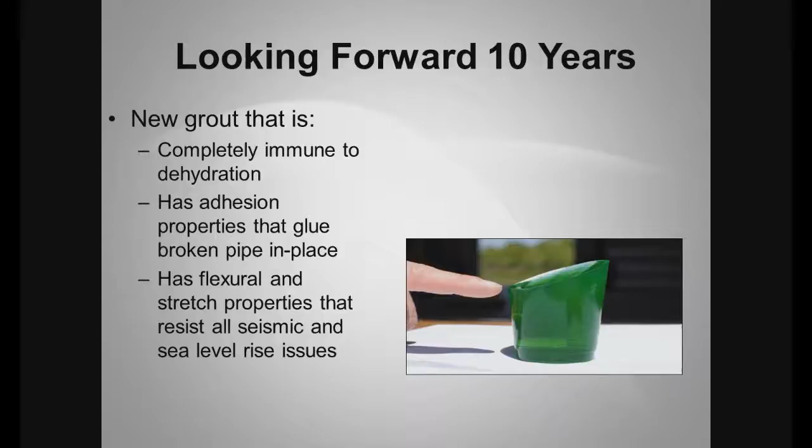I see mainline launched lateral packers being changed over from where they are now with long socks to being discrete joint testers and cameras installed. So we're not using so much grout to get those 50-footers, but we're discretely testing every single joint in the lateral tap connection. This is important because fully 2/3 of the joints that exist in our system exist in our laterals.

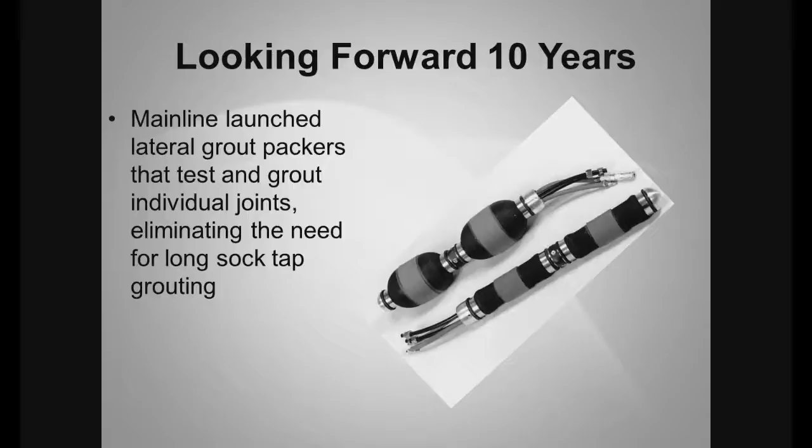I also see a time when we've got a completely automated gel time testing system that allows us to adjust the gel set time based on temperature continuously, so we always have an optimal amount of flow going out. And for that matter, a completely robotic visualization and artificial intelligence system that completely automates the test and seal aspects of the work. That'll double the production of a 2-man crew. It'll optimize the grout delivery quantities. And it'll cut in half the cost of delivering this already inexpensive service.

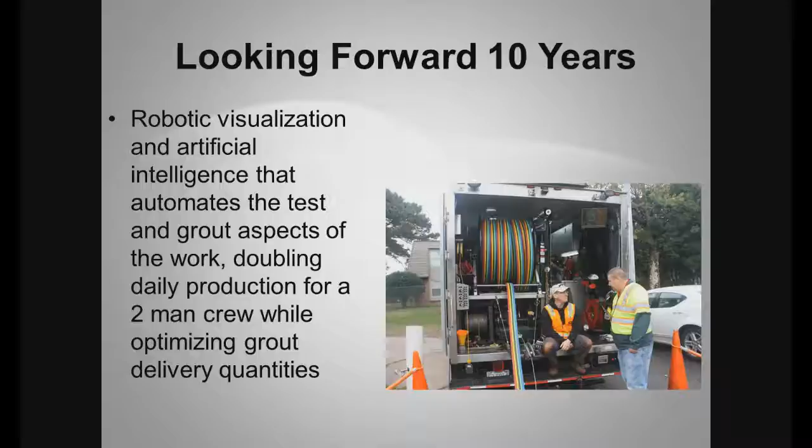And then my big dream, and it's one that's going to take a lot of work, is to develop a grout technician that doesn't chain smoke, gets his primary nutrition from something other than Doritos and high caffeinated beverages, and has a calendar that I can bring my kids into the studio and not be embarrassed and have to explain it later.

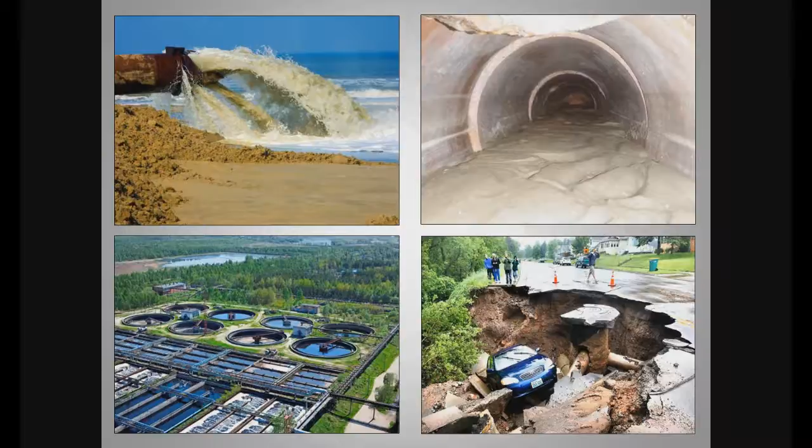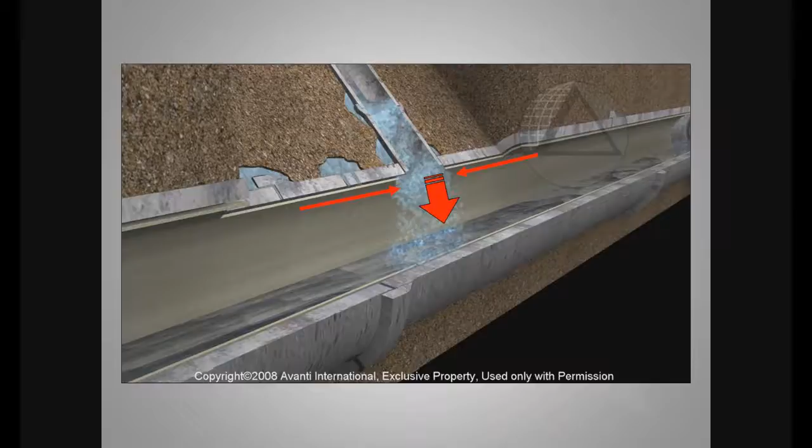Sewer overflows, increased cost, decreased capacity of our system, including sinkholes in many cases. And we collectively are responsible for solving infiltration problems, both for small communities and for large sewer districts. And of all the trenchless technologies available, only one is engineered specifically to stop infiltration at all points of entry, and that's injection grouting. John Manajek stated that grouting is complementary to CIPP lining.

In fact, we're seeing a trend among collection system managers and their engineering consultants to grout prior to lining. Why is that? Because lining doesn't stop infiltration. It reallocates the groundwater to another point of entry. It also doesn't stabilize the soil, whereas grouting stabilizes the sewer trench around the pipe, making that lining solution more durable. So they really work together. They go hand in hand.

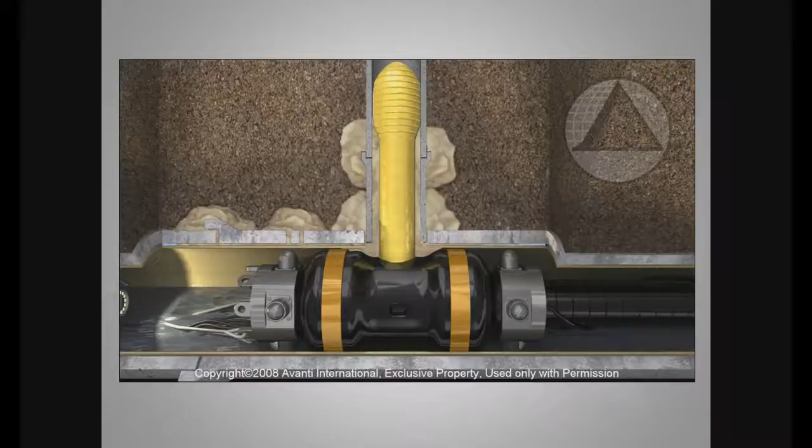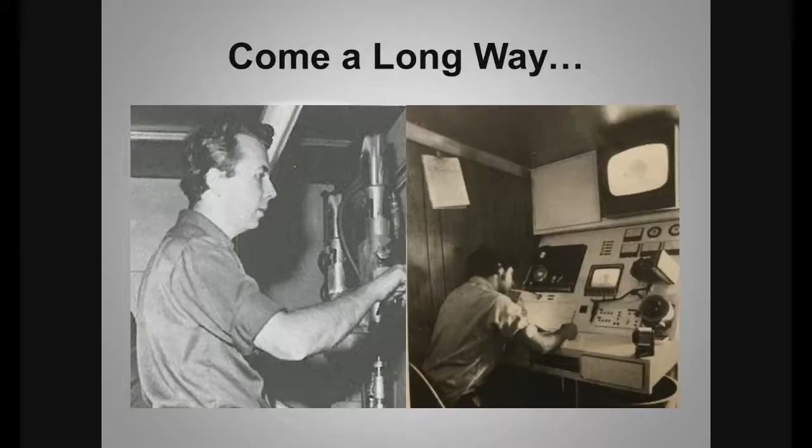Injection grouting is both a proactive maintenance practice and it's an engineered construction solution. And the look back at the early days of trenchless technology as shared by Harold Kosova and Pete Fleetwood helps us realize how far we've come. Thank you both for that. Dr. Vippu and Jim Shelton encourage us to keep investing in R&D, and both of you, I love hearing your vision for where the grouting industry is going. It's awesome.

Logiball, CUES, and Aries, you guys remind us that we're not alone, and we're in this together. Together, we're better. If that statement resonates with you during this election year for our 45th and what feels like our final president, then here's another one that you might relate to. Let's make America grout again. That would be, as we say around here, grout standing.

On that note, here's an Avanti future promise to municipalities who truly own the problem and to engineering firms who are accountable for their recommendations and specifications. Avanti will continue to maintain a leadership role within NASSCO and ICGA to continue advancing operating standards. And we'll continue investing in R&D and smart grouts for conveyance technologies to bring more specific scientific data to testing additives and design life and to growing the industry as we've done since 1978.